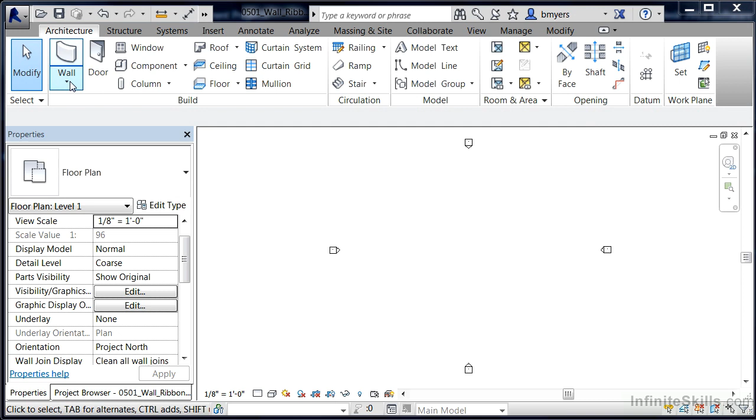The wall tools can be found in Revit on the ribbon underneath the Architecture tab. Now, technically, there are two separate buttons associated with the wall tool. The first button is the actual picture of the wall itself, and if that would be selected, it would activate whatever the last wall command that had been used. But the wall commands themselves can be found underneath the word wall and the little down arrow. So select on the wall tool, the actual word wall.

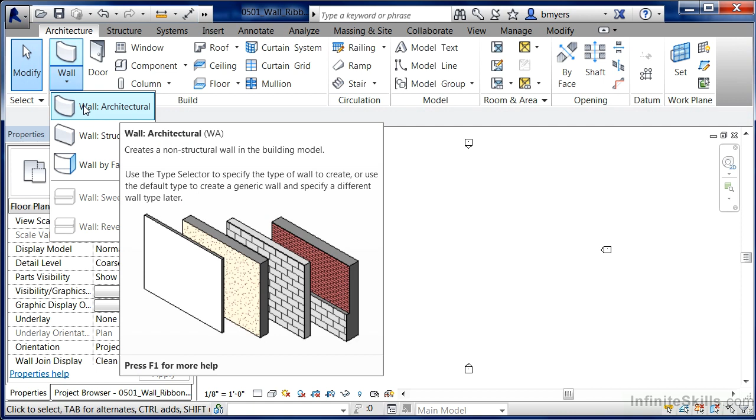When you do this, you'll find three separate types of walls that you can do. One's an architectural wall, the next is a wall structural, and the third is a wall by face. And based on whichever the last one you've selected and drawn in your drawing area is, that's the command that will activate if you ever select on the picture of the wall up above.

So that we can see the difference between a structural wall and an architectural wall, first select on Wall Structural. When you do this, and you scroll down on your properties, you'll see that the structural area underneath properties has some different structural components associated with it, such as standard information related to the depth of the rebar covers, and analytical analysis that can be applied to the walls. In other words, this is setting up your walls so that they can be designed by a structural engineer and have rebar inserted into them. Also, so that they can be exported out for structural analysis.

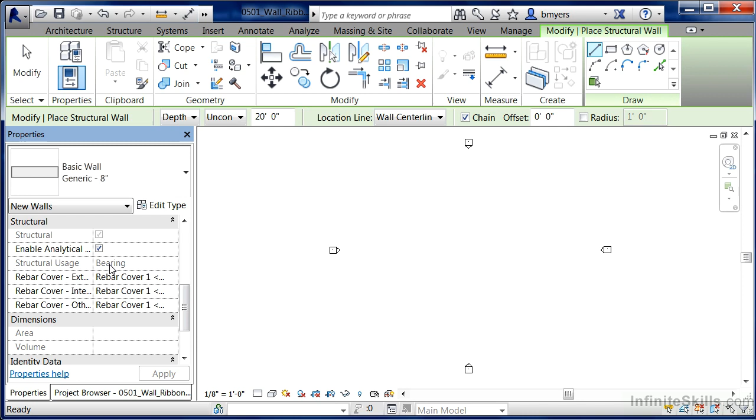Now, if you need to do these things, then using a structural wall is probably the proper way to go. On the other hand, if this seems to be overkill for what you're trying to accomplish, then using an architectural wall might make more sense. Hit the escape key on your keyboard once, hit it a second time, come back up to the wall tool, and select on Wall Architectural.

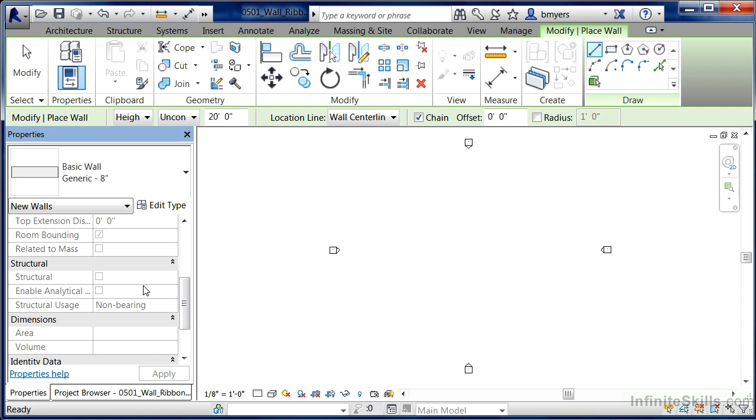When you do this, and you come down on your properties, you'll see that structural is currently grayed out. What this means is that you don't have to specify the depth at which the rebar is going to be inside of the wall, or you're never going to need to export out any structural properties to third-party software for structural analysis. We find that most architects are going to be using architectural walls, while structural engineers are more likely to use the structural walls.

The third type of wall that was on the list is a wall by face, and it's separate from these two types of walls. And if you just hover over that command for about a second, you'll get a flyout that shows what it does. By using wall by face, you select on the outside of that cylinder in order to create a wall that takes on the form of that shape. This is how you can go about designing some of your more complex wall types.

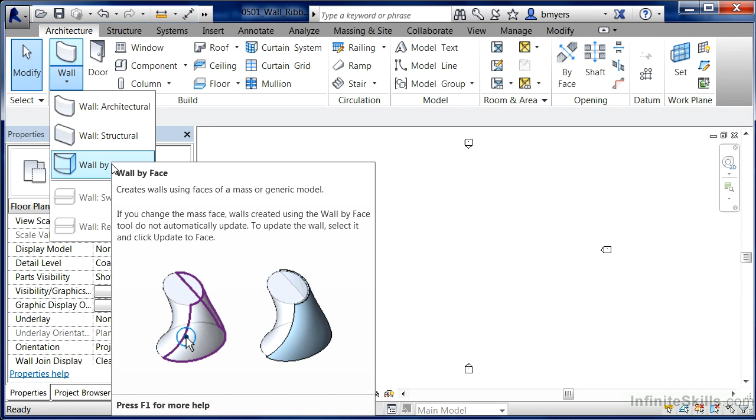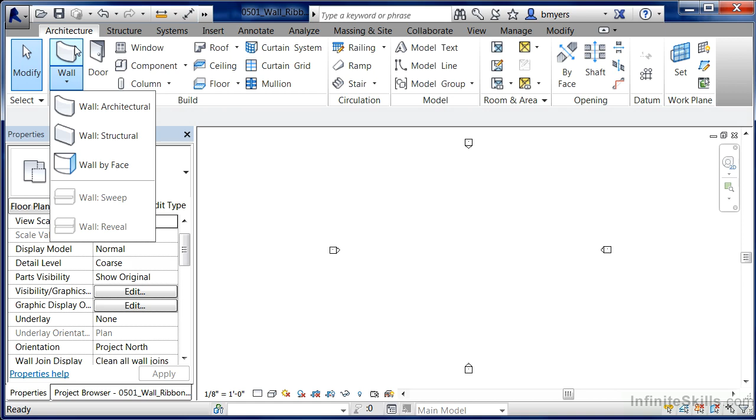You can find your wall command underneath the Architecture tab in Wall, remembering that the word wall will enable you to do either an architectural wall, a structural wall, which will give you those analytical properties, a wall by face, which enables some of the more complex walls, and then the picture of the wall up here on top will automatically execute whatever the last tool it is that you had used.